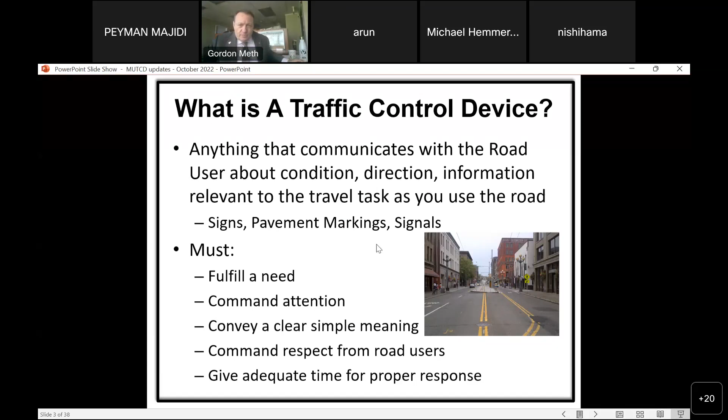So what is the MUTCD? The Manual on Uniform Traffic Control Devices, uniform being the operative word. It was adopted by federal regulations. It was first established in 1930. The latest edition that we've been living with for a long time is the 2009 edition, which may very well be one of the longest stretches between editions, with 3 revisions. Just a couple of months ago, in August 2022, even though there are proposed changes, there was a new revision put in for pavement marking retroreflectivity information, including the compliance date.

Something is blocking the slides, I've been told. Hang on. Any help, Peyman?

I can see the slides. I'm not really sure. Maybe let me see if I can. Is that better now? I think I just removed you off the stage, but we're still able to see your slides. Okay. No, I think it's okay. Okay. Other people are saying they can see the slides fine.

So the MUTCD regulates all traffic control devices in the U.S. on public roads and private roads open to public travel. A little bit more on that in a little bit. It promotes safe and efficient utilization of the road system. And the basic concept is simple: to treat same situations the same way to improve road user response and therefore safety. So the whole idea is, by being uniform, we improve people's understanding of what traffic control devices are and improve the reaction time.

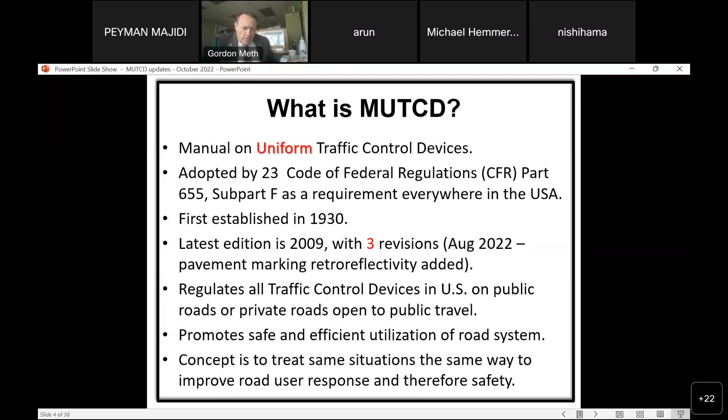So states are permitted to develop their own MUTCD so long as they meet the minimum standard of the federal MUTCD, and it's approved within 2 years of the adoption of MUTCD. 10 states, including Ohio, have their own MUTCDs. 18 states do not have their own MUTCD or supplements. All other states and jurisdictions have a supplement to the MUTCD where they put some local information, but they keep the federal manual as is.

Within the MUTCD, items are expressed in various levels. The first, most important, is a standard. It's required, mandatory, or prohibited. It's in bold. Sometimes you'll hear this referred to as a shall condition. It actually hasn't been called a shall condition since at least 1988, to my knowledge. But people in the industry still call it that. The next item is guidance. It's recommended, but not a mandatory practice. It used to be more or less called recommended, saying this is something you should do unless there's an overriding good reason not to.

The third item is an option, which is an allowable modification to a standard or guidance. So an option can change something. And then the last item is support. It's just informational statements. It doesn't really say there's an action or anything. It's just giving you some background. So those are the 4 levels you're going to find in MUTCD. The current MUTCD contains over 900 standard statements, or shall conditions, for those of you that still talk in those terms.

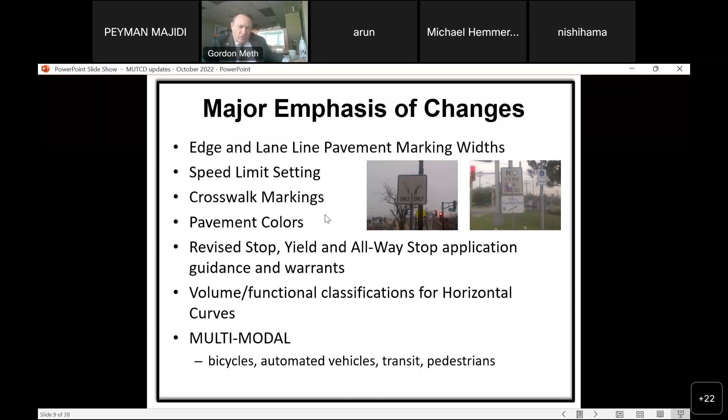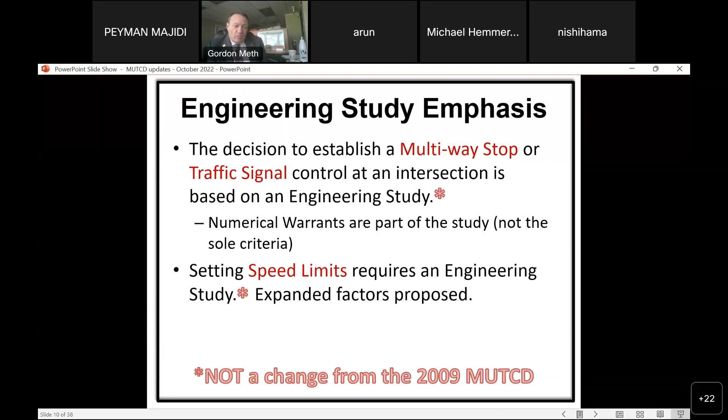Engineering study emphasis. One of the things contained in it is the decision to establish multi-way stop or traffic signal control at an intersection is based on an engineering study. Now, this is not really a change from the 2009 MUTCD. It's just a clarification, making it more front and center. Numerical warrants are part of the study and not the sole criteria. That is being emphasized in the new manual as well. And setting speed limits requires an engineering study. There's an expansion of the factors proposed for that purpose.

Lane and edge line widths. Due to both automated driving systems and safety research into human factors, there's recommendations to actually widen lane and edge line widths in certain circumstances. Proposed nominal, their normal width lines, are as follows: 6-inch wide for freeways, 6-inch wide where the speed limit is greater than 40 miles per hour, and 4 to 6-inch wide for all other roadways. Right now, 4 inches is the width, just for those of you that aren't that familiar with it.

Proposed wide lines, which is an application sometimes in MUTCD, would be as follows: 8 inches where 4 to 5 inch normal line widths occur, or 10 inches where 6-inch normal line widths occur.

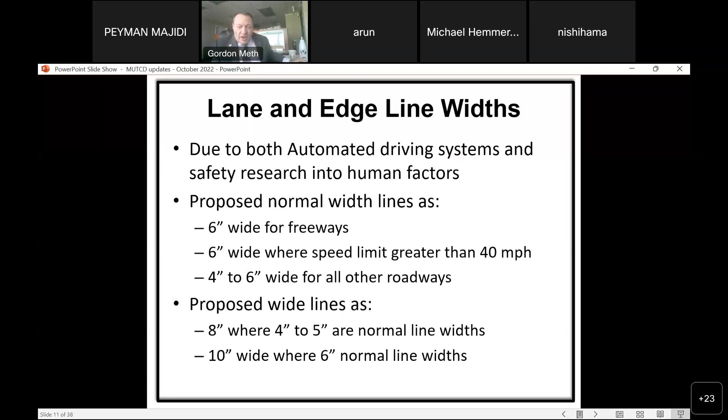The Institute of Transportation Engineers is concerned that the cost implications of this change haven't been addressed. Given that there's no standard for assessing the condition of lane markings, wider lines would last longer, as there's really 50% more material to wear away versus the 4-inch edge lines.

So just so you know, I've come to understand that there's actually no standard for looking at a pavement marking and saying this no longer is good, except for the fact that the new MUTCD just adopted retroreflectivity standards for pavement markings. So you're going to have to come up with the retroreflectivity. It's a little hard to figure that out, though, in daylight.

And some of the standards that are out there, usually for work zones, refer to what percent of the lane line still exists. Like in a work zone, a lane line is supposed to be not acceptable after 10% of the material is gone. So it has to be at least 90% there. A lot of agencies use probably closer to 50%.

So interestingly enough, at least 30 states have policies where they actually use 5 to 6-inch edge lines already. They just do. And Highway Safety Manual research has really found that 6-inch edge lines reduce fatal and injury crashes by 15 to 38% versus a 4-inch edge line. So the reality is, even though people think this is only because of autonomous vehicles, there's a safety benefit to putting in wider edge lines.

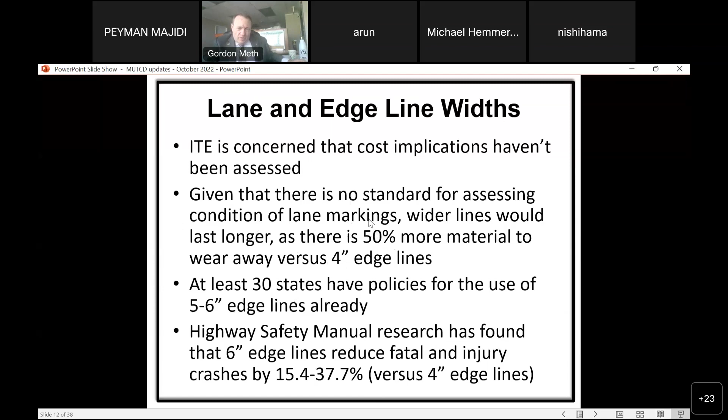So let's jump to speed limit signs for a minute. I've juxtaposed what the current manual says on certain items versus what the proposed has. The current manual says an engineering study is required for a speed limit sign. The proposed would also still require one.

Speed distribution within the study is required in the current manual. In the proposed change, speed distribution is only recommended. So this gives you a little more flexibility to actually conduct a speed limit study without having to go collect speed distribution data. I think you should still do it, but if you're in a pinch, you don't necessarily have to.

I'd also say that, interestingly enough, if you look to the definitions in the MUTCD, two things that are talked about are engineering study and engineering judgment. So engineering study just means it's written by an engineer. And engineering judgment means a decision was made by an engineer. So the big difference between the judgment and the study is documentation.

I remember once being asked in a deposition, did I conduct an engineering study for a certain traffic control device on private property? And I said, well, I'm an engineer and I performed an analysis of this. So yeah, I performed an engineering study, because that's what the definition is. It was an analysis or a written finding by an engineer.

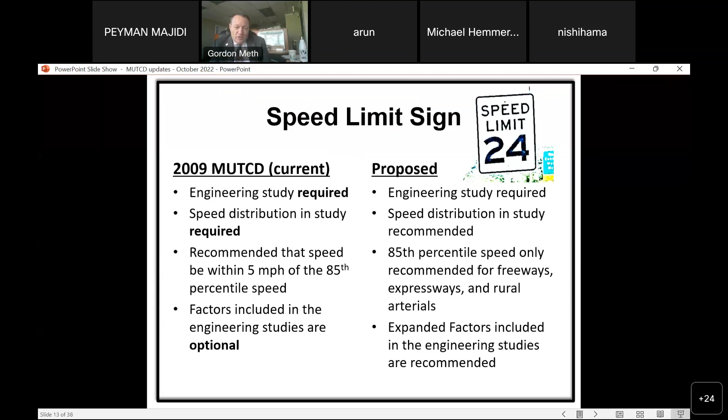Factors included in the engineering studies are optional in the current manual. Within the proposed, there's expanded factors included in the engineering studies which are recommended. So here's the expanded factors that you can expect to see in speed studies. The speed distribution, crash experience, road characteristics such as lane widths, shoulder condition, sight distance, grade, alignment, or median type.

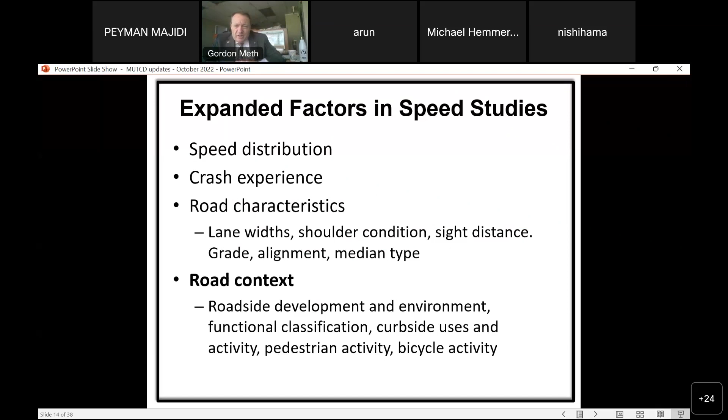Road context, that would be the roadside development environment, functional classification, curbside uses and activity, and pedestrian activity and bicycling activity. So here's a quick history of speed limits and the MUTCD.

So the first time there was any recommendation of setting speed limits was the 1948 edition. It really first recommended speed studies to establish speed limits. That was where it was introduced. The 1971 edition mentioned both the 85th percentile speed and the pace speed when setting speed limits.

The pace speed is when you distribute all the speeds for traffic. It's the 10 mile an hour band or range that the majority of drivers travel within. And sometimes you can study pace in saying what percentage of traffic is in the pace. If you do a standard speed study, a lot of the data collection machines will tell you what the percentage in the pace is and what the pace is. So say the posted speed was 35 miles an hour. The pace may very well be 30 to 40 miles per hour.

It was the 2000 edition that added guidance that the speed limit should be within 5 miles per hour of the 85th percentile speed. That is the first time that was ever discussed in the MUTCD, that we should be setting speed limits within 5 miles an hour of the 85th percentile speed. And the thought process was fairly simple at the time, and I believe it still holds true today in many instances, is that if you basically just change the speed limit, it's not going to change speeding.

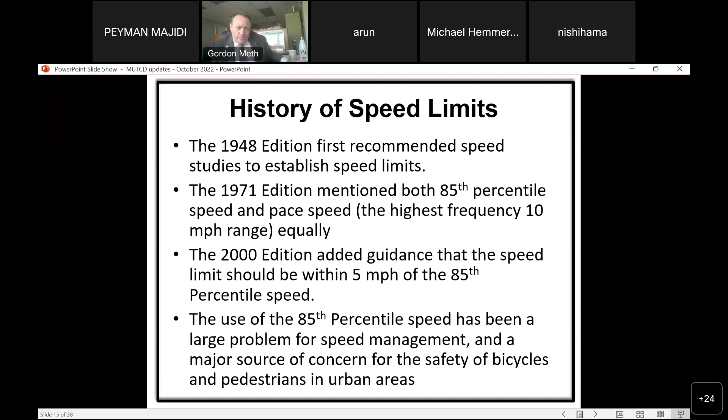So jumping ahead to other topics, crosswalks. There's a lot of focus in the new manual on crosswalks. Part of the new guidance: because non-intersection pedestrian crossings are generally unexpected by the road user, warning signs and high visibility crosswalk markings should be installed. That's some of the language in the new manual.

So the proposed change is to use high visibility crosswalk markings. That would be basically piano keys, a ladder, or a double paired thing. So something high visibility that has a lot more target value to the motorist, if you're doing a non-intersection crossing at some location that establishes a crosswalk. The curb ramps now need to be within the crosswalk lines. That is another component. Right now, that's only a suggestion. It's not an actual requirement.

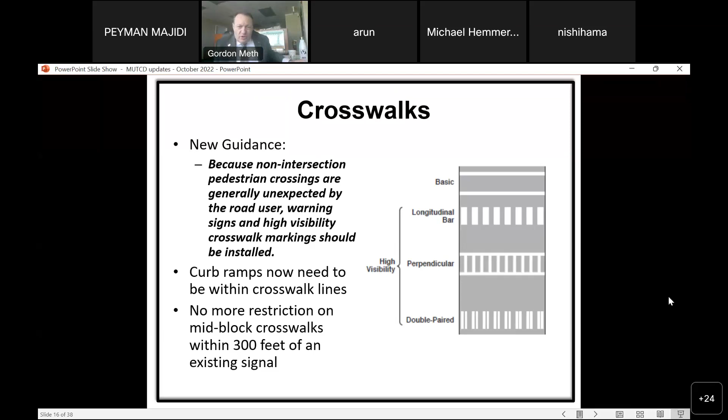And there is no more restriction on having mid-block crosswalks within 300 feet of an existing signal. In the current manual, you're not supposed to have mid-block crosswalks within 300 feet of an existing signal because the expectation is that people will divert and go to the signal, cross there, and come back, a signal being a place where one would expect pedestrians to cross. Well, the reality is most people don't want to go that far out of their way and back. So they're crossing anyway. So by restricting that ability, we're not changing behavior. We're just creating a false sense of security and preventing the ability to do something about it.

There's new guidance on decorative treatments for crosswalks, a new section on RRFBs, rectangular rapid flashing beacons. And hybrid beacons, those are the HAWK signals, are now allowed to be installed at intersections and driveways. There's really nothing restricting them now, except some guidance that tells you you shouldn't do it, but nothing that is actually binding.

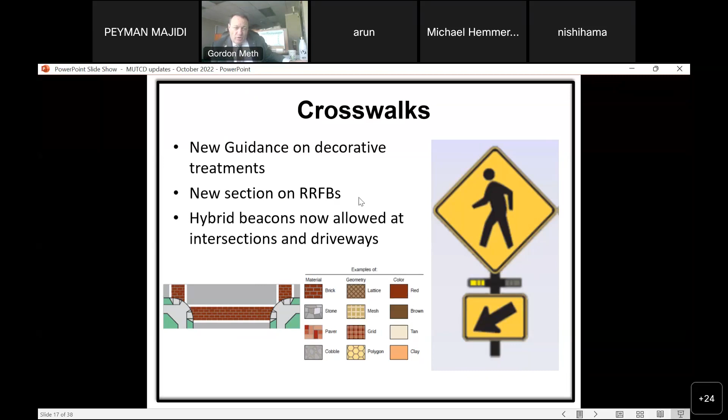So here's an example of the RRFB to the side, and there's some other graphic examples of the options you'll have for decorative treatment. The important thing when you have decorative treatment, though, is those white lines on the edge of it are still critical to the value of that crossing. Crosswalks and traffic signals.

So some of the requirements that are in the new manual: one, pedestrian heads are going to be required at any signalized intersection with a crosswalk. A marked crosswalk will be required to have a pedestrian signal head. Right now, it's not required.

There's a buffer that was introduced in the last manual, the 2009 manual, of 3 seconds between when the walk indication, or the flashing don't walk, ends and conflicting traffic can be released. That's being reduced to 2 seconds instead of 3. I think the major reason for that change is a lot of jurisdictions use 2 seconds of all red clearance now, to make that consistent rather than make them add in a whole extra second.

Clearance, and the funny thing is, somebody once told me the only thing you need to know to be a traffic engineer is how many seconds there are in an hour. Really, the traffic signal just divides that right of way into a bunch of seconds constantly. So every second matters when you're designing a traffic signal timing plan.

Clearance times now include the shoulder instead of just the edge of the travel way. Right now, you have to provide clearance time from the edge of the travel way to the edge of the travel way. The only thing is research is showing that people are not actually waiting at the edge of the travel way before crossing. They're staying off the road. So that's why now the shoulder is going to be included in that width.

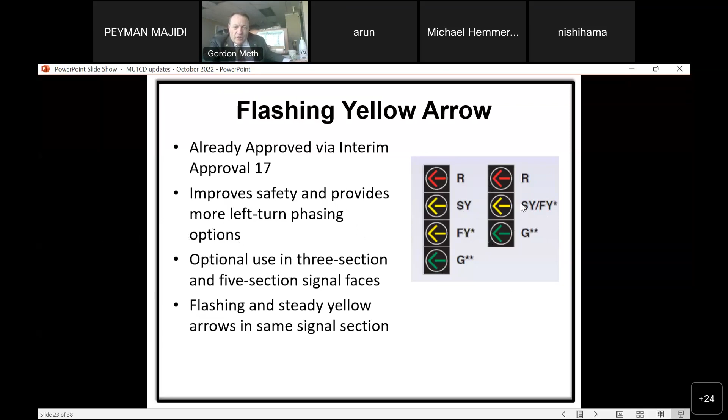Flashing yellow arrow, which is already approved via Interim Approval number 17. Flashing yellow arrows basically flash to tell you you can make a left as long as you yield to oncoming traffic. So it improves the safety and provides more left turn phasing options. But there's the optional use of 3-section and 5-section signal faces, and flashing and steady yellow arrows in the same signal section. So the proposed changes would actually allow you to take that one yellow signal and do it instead of having to have 2 separate heads in your signal.

Overhead signs on conventional roads. This is another proposed change from the MUTCD. The proposed letter size to be commensurate with context. So for conventional roadways, right now, if you follow the guidance, the guidelines are really designed for freeways and expressways. Within the proposed changes, there will be smaller letter sizes needed on conventional roads, which gives you the ability to use lighter weight mast arms, smaller ones, and it's really better suited to urbanized conditions where needed.

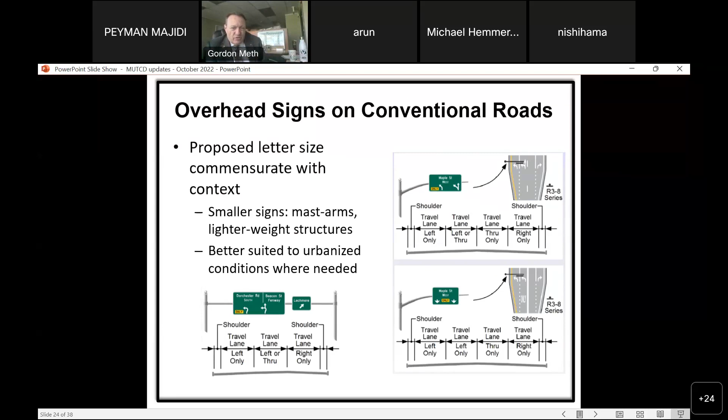Horizontal curves. I think there's an unwritten rule in MUTCD that every edition of the manual has to totally change everything about horizontal curves. Every edition that I've worked with in my career, every time you get a new manual, the information on horizontal curves changes. And this was one of the items that had a hard compliance date of December 31st, 2019, meaning every single horizontal curve in use had to be signed or marked as required by the current MUTCD by that date.

In the frequently asked questions of MUTCD, you can find that when asked about why can't you use more engineering judgment on this and leave things the way they were, the answer is 28% of our fatal crashes in this country come from runoff road crashes on horizontal curves. So this is our weakest link when it comes to our transportation systems, at least for fatal crashes.

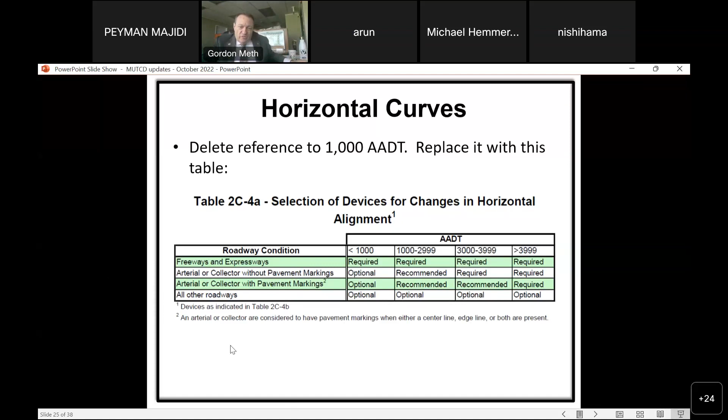So the proposed changes include deleting the reference to 1,000 vehicle AADT. Right now you're required to follow the rules if you have more than 1,000 vehicles a day. It's going to be replaced with this table 2C-4A for devices. Now the interesting thing is that the new changes actually incorporate considering pavement markings. The current ones don't. So you could basically have less signs for a given volume if you have pavement markings versus roads that don't. That's the main difference. And it tells you what devices to select for your horizontal alignment.

So the next table, 2C-4B, is the application. In this case, this is one of the only instances, I believe, in the MUTCD that focuses on posted speed instead of actual operating speed. Most factors are based on operating speed, meaning that if your speed limit is artificially low and everybody's driving faster, you should be using the actual speed. But in this case, the speed differential refers to the safe operating speed of a horizontal curve versus the posted speed limit.

So if your speed differential is 5 miles an hour, everything is optional, and they talk about pavement markings or advance warnings and or signs. 10 miles an hour, recommended. 15 miles an hour or more, you are required to do something. Use delineators and horizontal alignment warning signs, or chevrons if it's 20 miles per hour or more. That's what you're required to do.

Okay, vehicle speed feedback signs. A lot of us are probably becoming familiar with this. So this is a traffic control device. There are some actual requirements being proposed for the current manual. One of the main factors is standardized designs for the sign and the plaque, and a yellow background color being required because the message when it shows your speed is a warning, not a regulation.

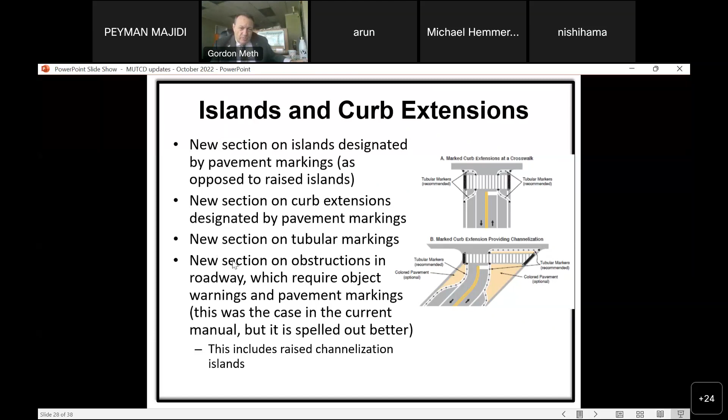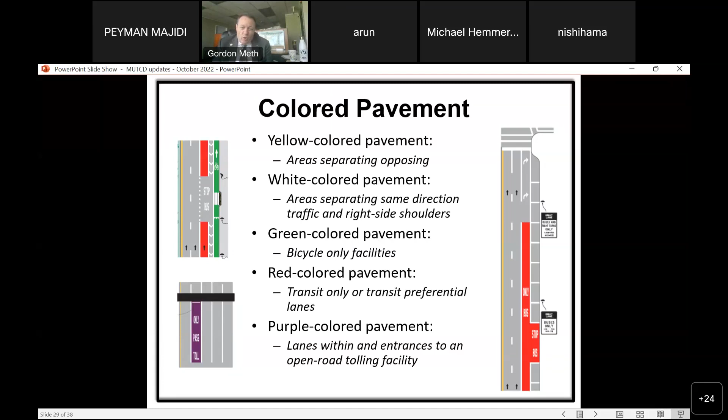Colored pavement. The proposed change to the MUTCD will intend to regulate colored pavement. So yellow colored pavement means areas separating opposing traffic, just like yellow line. White colored pavement, areas separating the same direction traffic and right side shoulders, just like the colors of stripes. Green colored pavement would be for bicycle only facilities. Red colored pavement, transit only or transit preferential lanes. Purple colored pavement, lanes within and at entrances to open road tolling facilities.

Part 5 of the MUTCD, devoted to low volume roads, is proposed to be eliminated. A low volume road was defined as roads with less than 400 vehicles a day outside built up areas of towns, cities, and communities. Everything in this section is being taken away and moved to the appropriate section of the manual as an option for a low volume road environment.

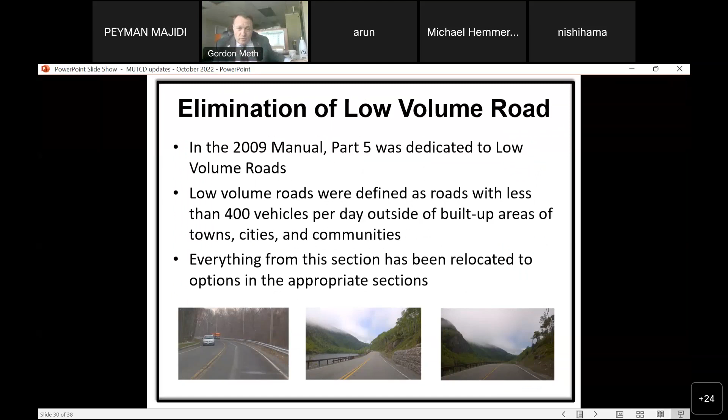Automated vehicles. There's a new section. So that's why they had to get rid of part 5 so they can free it up for automated vehicles. In this section, nothing is a requirement. It's only guidance. Agencies decide whether to fit their roads for automated vehicles. There's no mandate to do so. The new section provides agencies interested in automated vehicle systems a set of criteria using the current body of knowledge.

Recommended factors include lane widths, sign orientation, the refresh and flicker rate for LED signs and signals, and ghost lines in work zones. Meaning you need to do a better job sometimes of obliterating or eradicating existing lines when you're at work.

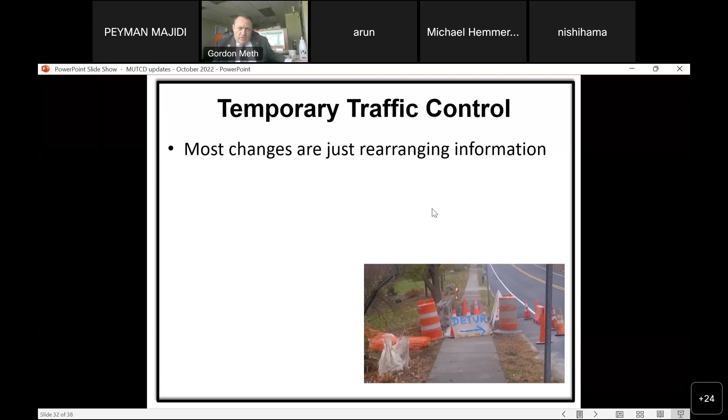Temporary traffic control. Most of the changes in the section on temporary traffic control, part 6, are only rearranging information, not any change to what you have to do. The one area that there is a change is related to the accommodation of pedestrians with disabilities, so it changes the consideration of level of usage by pedestrians with disabilities in design decisions. So all pedestrian detours need to be accessible, period. That is the one change in the manual.

Right now, there is consideration that if you don't have frequent pedestrian use, you can actually do a little less. No, now, if you're interfering with traffic, you have to detour pedestrians, just like shown in this little picture, which was a real work zone that I found in the field one day.

I guess there's no spell check for people that make custom signs.

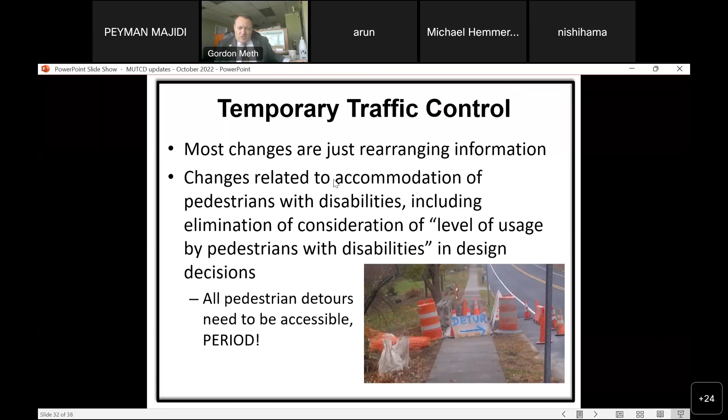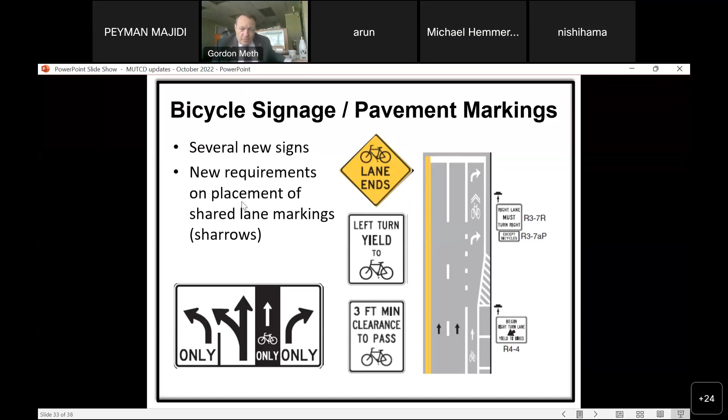Bicycle signage and pavement markings. There are several new signs for bicycles. And there's new requirements on placement of shared lane markings, which are also known as sharrows. So there's actually requirements in their placement. Bicycles and signalized intersections. There's a lot of changes relative to this. There are now bicycle signals covered. They actually are in the current manual, but it's been really expanded.

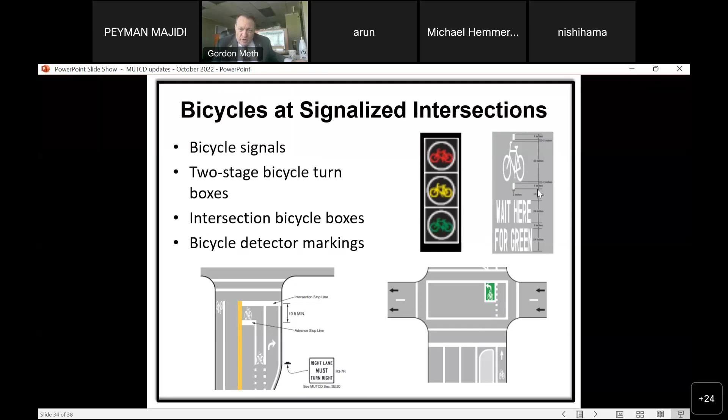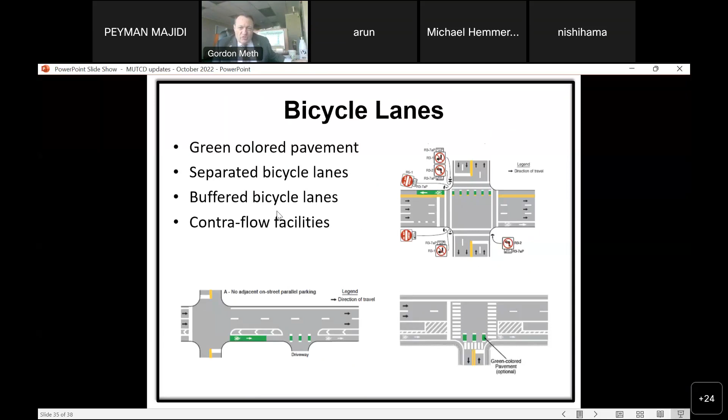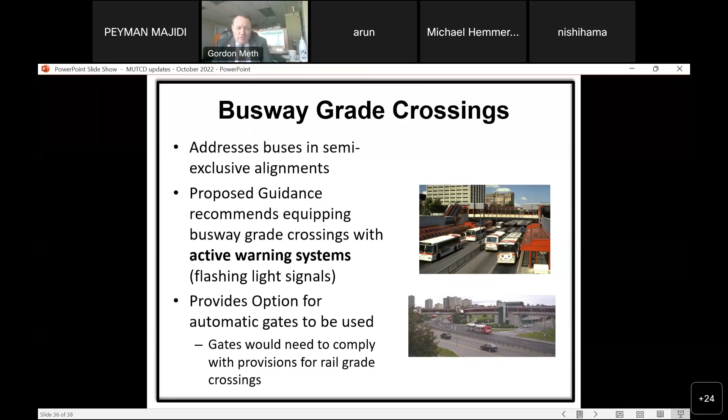Busway grade crossings. There's a whole new section for busway grade crossings, which addresses buses in semi-exclusive alignments. Proposed guidance recommends equipping busway grade crossings with active warning systems, which makes them a lot more like flashing light signals. All right, so active warning systems make them a lot more like rail grade crossings. Provides an option for automatic gates to be used. Gates would comply with provisions for the rail grade crossings.

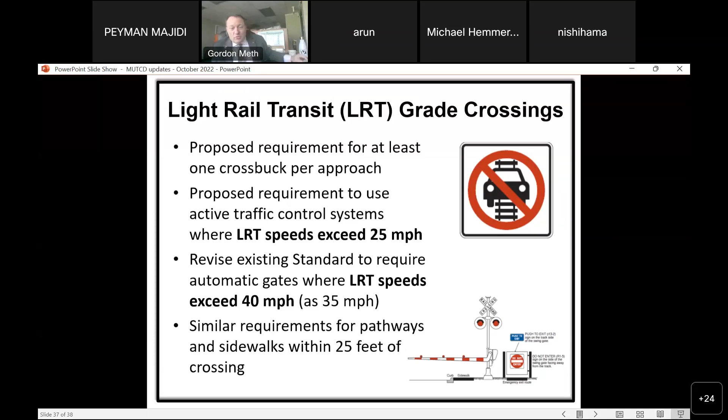So that actually concludes the presentation I've got. Once again, this is not exclusive, this is not everything that's in the manual. These are just the high points. Number one, it's too late to comment. Number two, so this is where we are in the process.

We had our first publication on December 14th, 2020. Comments were due May 14th, 2021. The 2009 MUTCD only had 15,000 comments, whereas this one had 26,500 comments, a lot of them having to do with speed limit setting.

So right now, the federal government is in the process of reviewing and addressing the comments. So they have to revise the draft to consider the comments, and then they're going to publish the final rule adopting the new edition of the MUTCD in the Federal Register. There is no requirement to go back to the public and take more comments.